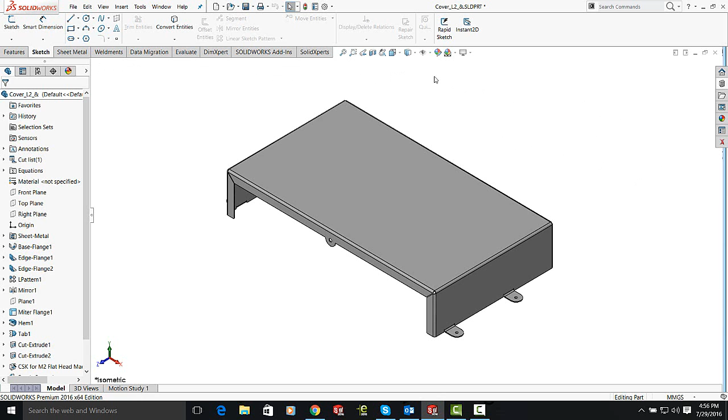So that's okay. But when I send this part out for quote, I get an estimate back for my cost much higher than I expected. Now the question is why? If you have the Pro and Premium, you can run costing for sheet metal and that'll give you a good idea. But if you don't know your labor rates and so forth, you're not a production house, you just want to have some guidelines. There is a tool, and it's in your Express products. It's called DFMxpress.

Now the first time you use it, it will kick you up a request for code, and you go to mysolidworks.com and get your code, and that'll be good for the entire time you run that particular version. Once you have your code and you're running it, now I go here to my settings button, and I want to make sure I'm on sheet metal. The first time you use DFMxpress, it may be in fact defaulted to mill and drill. So make sure we're on sheet metal.

Down here, some of the default values can be quite large. So this last one is the bend radius, and I'm going to change this to 1.5. Remember my sheet stock was 1.2, and I usually want a minimum bend radius, at least my sheet thickness or a little bit bigger. Now, when I come back to that and run, it actually does a bit of an abbreviated feature recognition.

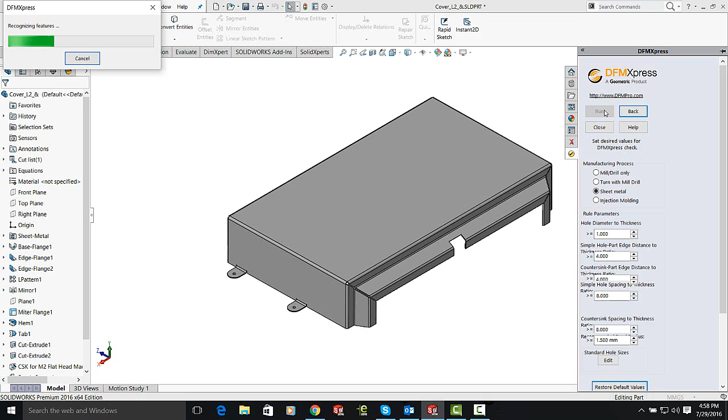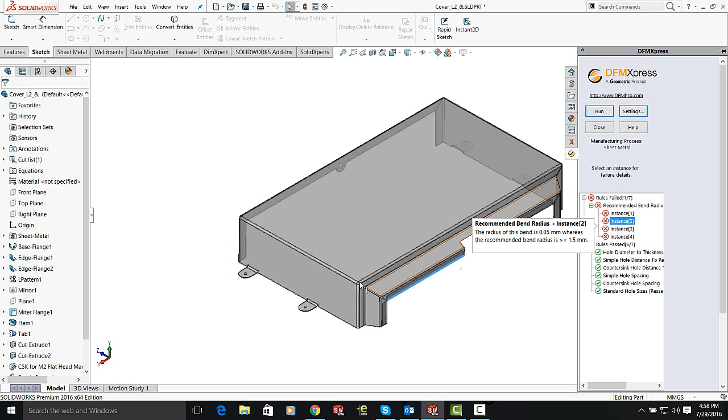And it gives me a quick pop-up. Here it's highlighted where my bend radius is minimal or below my suggested rule. And sure enough, when I highlight, those are the bend radii associated with this hem feature. And sure enough, if I look at that hem feature, I've got a flat or closed profile hem, which, yes, absolutely, that's a much smaller radius than my preferred rule.

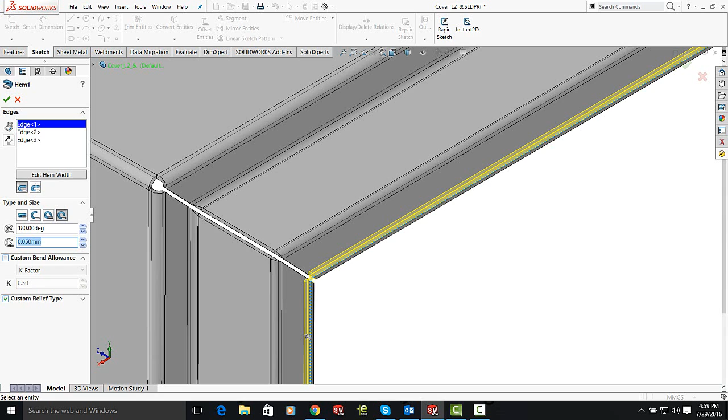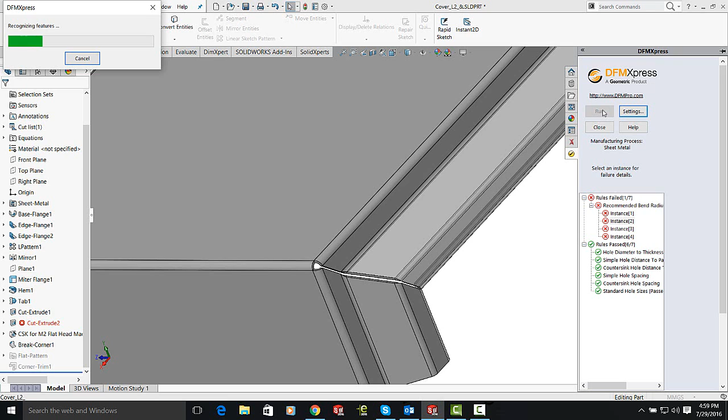Here I'll switch it to a rolled hem, make that my 1.5 rule radii, and rebuild. Now you may not be able to live with that case in every scenario, but in this case, if I go back, rerun my DFMxpress, now all my rules are cleared, even the bend radii.

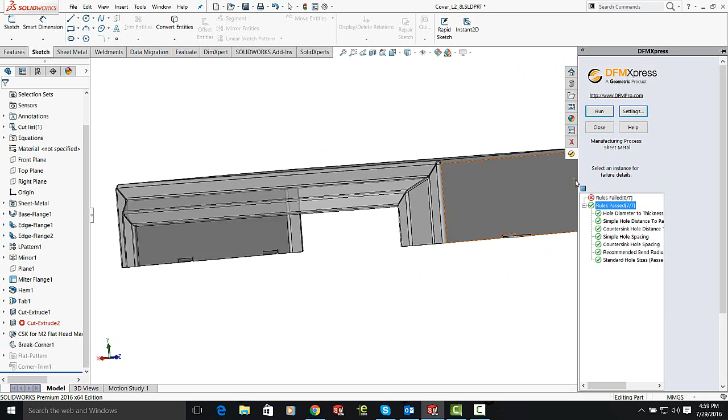So this is just an illustration of how to take the DFMxpress tool, apply it to a sheet metal part, run your rules, and get an idea of what perhaps is driving up your purchased part expense. And it'll give you a clue as to what features you may want to edit to adjust for that expense.

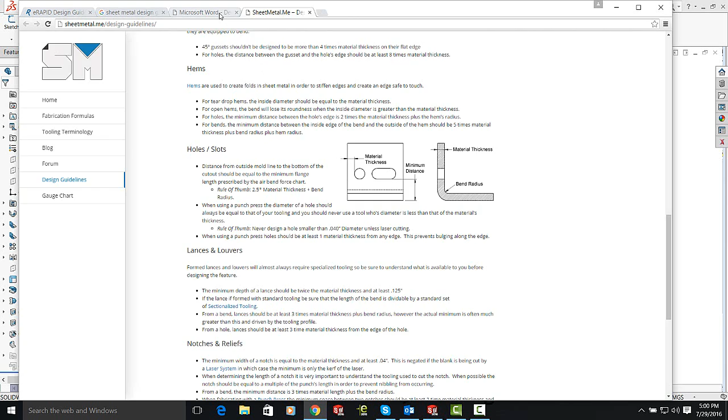How do you develop sheet metal rules? You can find them on the web if you do a search for some of your design guidelines. Certainly go to your vendor if they offer it and on their website. Also, the Society of Manufacturing Engineers has several good textbooks on the basic sheet metal forming technologies, press brakes, air bending, and so forth.